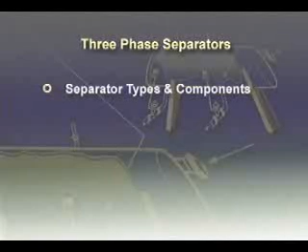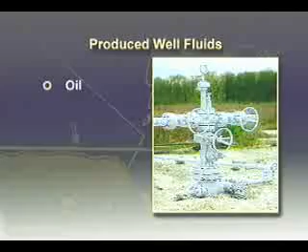This module on three-phase separators describes separator types and components, principles of operation, and design procedures. Produced well fluids typically consist of varying amounts of oil, water, gas, and sediment. The first step in processing these fluids is to split them up into their individual components.

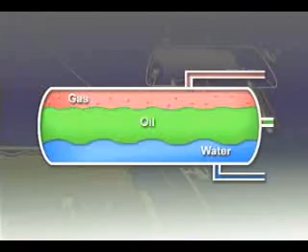This generally takes place at some type of separator. A three-phase separator uses gravity to separate produced well fluid into gas, oil, and water phases.

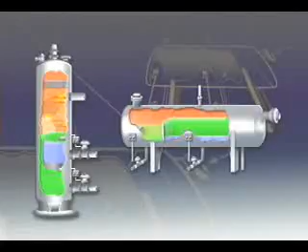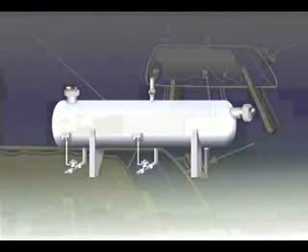Three-phase separators may be designed in either horizontal or vertical configurations. In a horizontal separator, fluid enters the vessel and hits an inlet diverter. The resulting sudden change in momentum provides the initial gross separation of liquid and vapor. The liquid collection section of the vessel must provide sufficient time for the oil and emulsion to form a layer or pad above the free water.

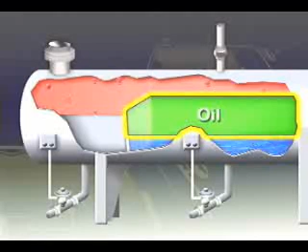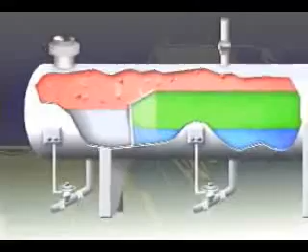A weir maintains the oil level, while an interface controller maintains the water level. The oil spills over the top of the weir, and then a level controller, which operates the oil dump valve, controls its level.

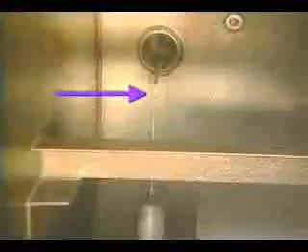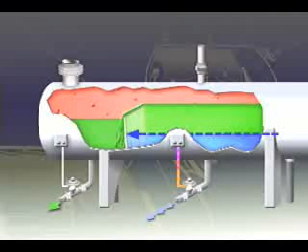An interface level controller senses the height of the oil-water interface. This controller signals the water dump valve to release as much water from the vessel as is needed to maintain the oil-water interface at design height. The gas flows horizontally and exits through a mist extractor to a pressure control valve, which maintains constant vessel pressure.

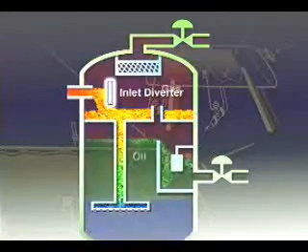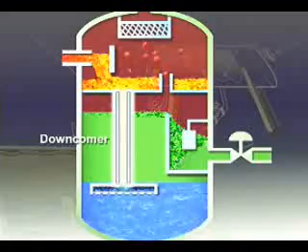In a vertical three-phase separator, flow enters the vessel through the side. As in the horizontal separator, the inlet diverter separates the bulk of the gas. A downcomer is used to transmit the liquid through the oil-gas interface to keep from disturbing the oil skimming action. A chimney equalizes gas pressure between the lower section and the gas section.

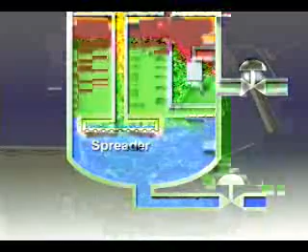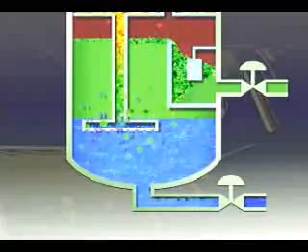The spreader, or downcomer outlet, is located at the oil-water interface. From this point, as the oil rises, any free water separates out from the oil phase. The water droplets flow counter-current to the oil. Similarly, the water flows downward, and oil droplets trapped in the water phase rise counter-current to the water flow.

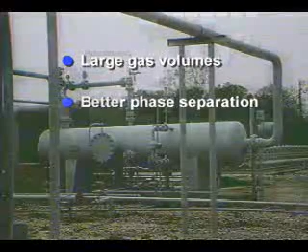Selection of a separator type is based primarily on gas handling requirements and space availability. A horizontal separator is normally more efficient at handling large volumes of gas, and because of its large interfacial areas, it has better phase separation capability. It does not handle solids as well as a vertical separator, and it requires more space.

A vertical separator, on the other hand, has good solids handling capability, requires far less space than a horizontal separator, and has much better liquid surge capacity, but it is more difficult to service.

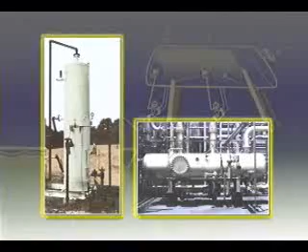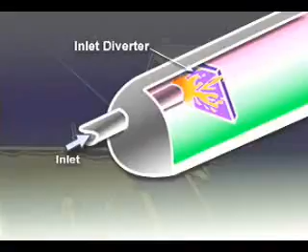Regardless of type, all three-phase separators have in common certain internal vessel components. Inlet diverters provide the initial gross separation by changing the flow direction as fluid enters the vessel. The deflector baffle, shown here, is one type of commonly used inlet diverter. Another is the cyclone inlet.

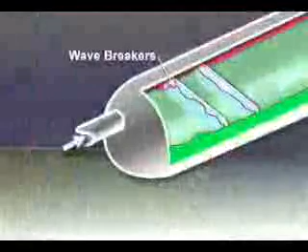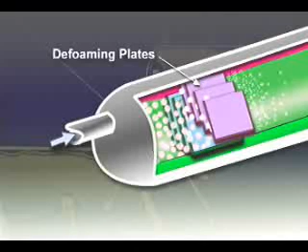Wave breakers limit the wave propagation that might otherwise occur in large horizontal vessels. Defoaming plates reduce foaming at the gas-liquid interface, which tends to occur when gas bubbles are liberated from the liquid.

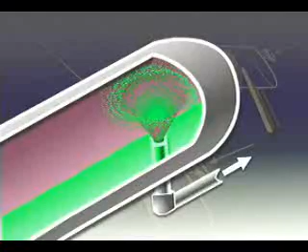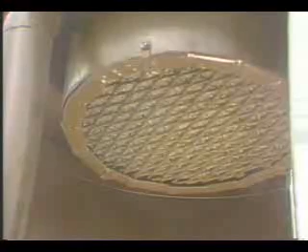A vortex breaker keeps vortexes from developing when the liquid control valve is open, thus preventing gas from being drawn out of the vapor space and re-entrained in the liquid outlet. Mist extractors coalesce and collect small liquid drops from separated gas before the gas leaves the vessel.

Potential operating problems in three-phase separators include foaming crude, paraffin buildup, sand accumulation, liquid carryover, gas blow-by, and formation of emulsions.

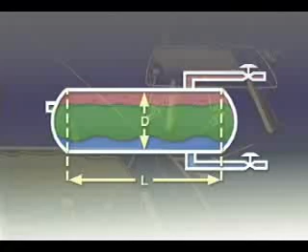Separators must be sized properly in order to avoid such problems. Design procedures require a thorough understanding of the separator operating principles and their relation to such variables as settling of the oil droplets, retention time, and droplet size.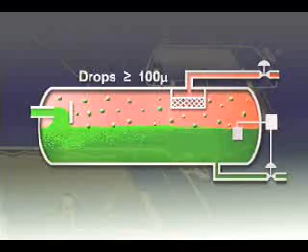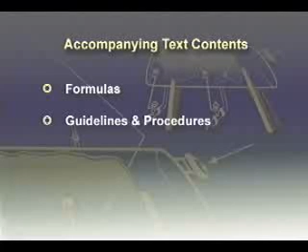The text that accompanies this presentation contains the necessary formulas for designing a three-phase separator, together with guidelines and step-by-step design procedures for sizing and selecting a separator. The text also has tables of maximum allowable working pressures for various vessel diameters, along with example exercises with solutions.

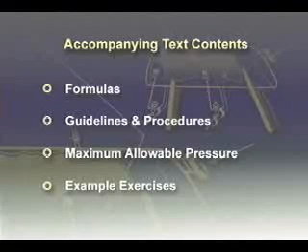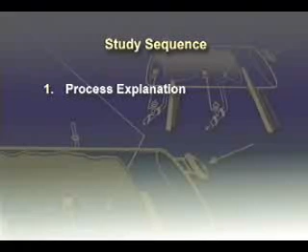After viewing this introductory video, please follow the sequence outlined here. First, read the process explanation. Then, review the equipment description. Then, study the design theory and procedure. Work through the design examples.